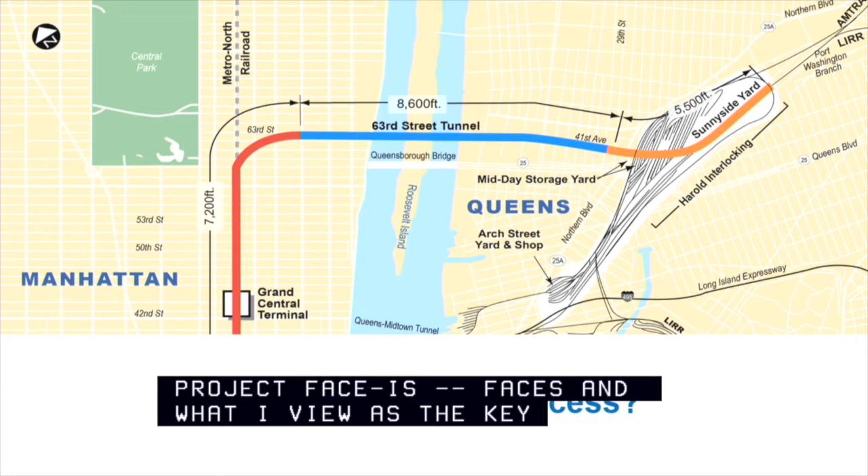East Side Access is MTA's largest capital project. In fact, it's the largest federally funded transportation infrastructure project in the United States. Together with Long Island Railroad's third track, East Side Access is the first significant expansion of the Long Island Railroad in over 100 years. We're finally making investments in a system that was built when Long Island had 37,000 people, when today it has almost 3 million.

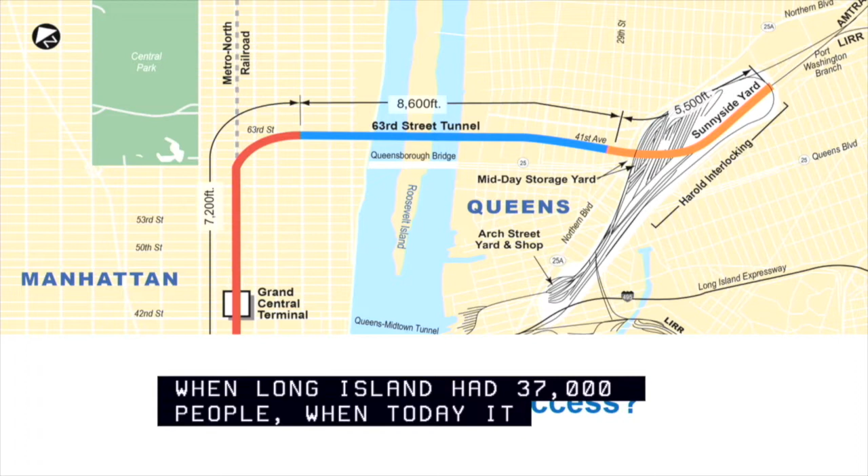Let me remind you what the project includes: 8 miles of tunneling, 25 miles of new tracks, a brand new 350,000 square foot concourse beneath Grand Central that is approximately 8 city blocks long, making it the greatest expansion in that great terminal in its 104-year history.

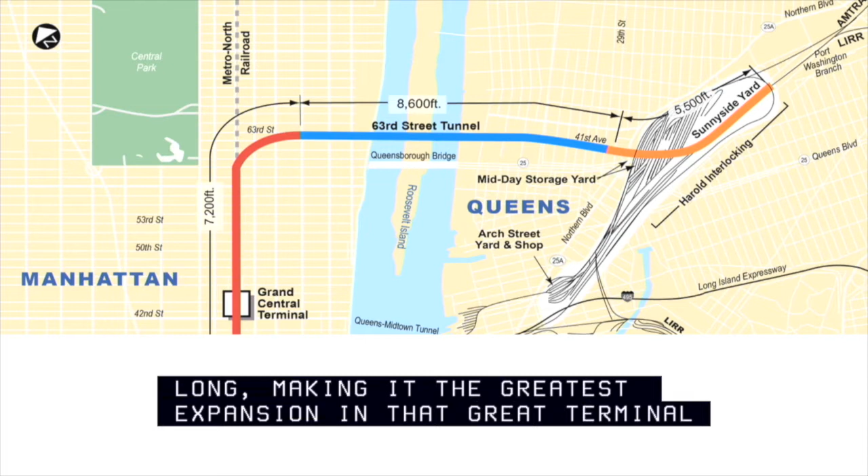And third, not to be forgotten, modernizing and fortifying the Harold Interlocking, the busiest railroad interlocking in North America, where there are almost 800 train movements a day, and which is utilized by 3 of the largest passenger rail carriers in the country. So what does the project mean for the city, Long Island, and the region?

It means faster commutes, direct access to Grand Central, fewer delays, and less crowding. Specifically, the project is going to provide Long Island Railroad customers on all 11 lines direct access to Grand Central, saving those commuters up to 40 minutes per day, which adds up to roughly 10 full days a year for family, work, and other activities. 50% of today's Penn Station-bound Long Island Railroad ridership is expected to use the new Grand Central facility, which is going to reduce overcrowding in Penn and on the surrounding subway lines.

The time savings I've just mentioned have real economic benefits. Government metrics peg the value of those time savings at roughly $300 million a year. And faster commutes mean real opportunities for working families on Long Island to access high-paying jobs in Manhattan. And last, not to be forgotten, East Side Access will create redundancy, which, as we've learned from natural and human events in the past decade, is something we desperately need.

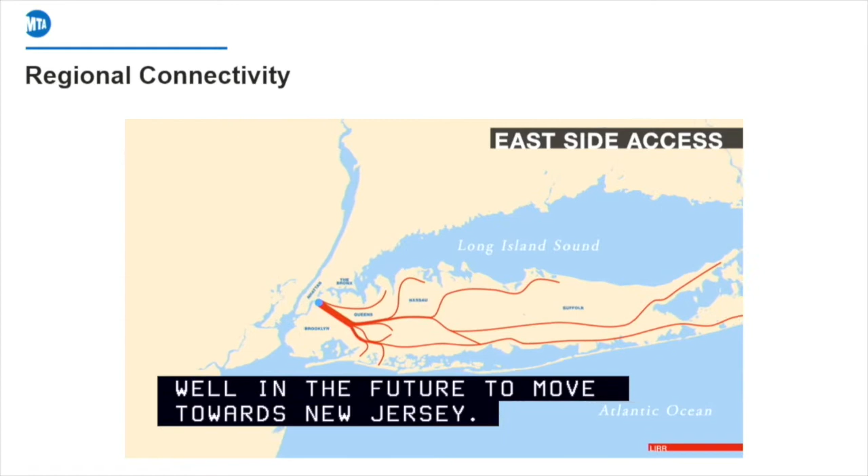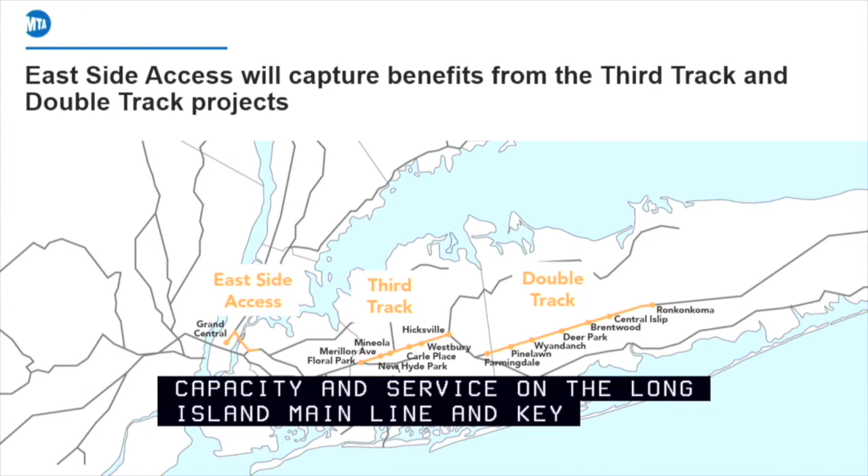It also allows us to capture the full benefits of the very significant third and double track projects in Long Island, significantly increasing capacity and service on the Long Island Main Line and key branches, and not to be overlooked, reverse commuting, which is extremely limited today, is made possible with the capacity and reliability focus that East Side Access will provide. As I mentioned at last month's Railroad Committee meeting, East Side Access is a massive investment in the state of good repair.

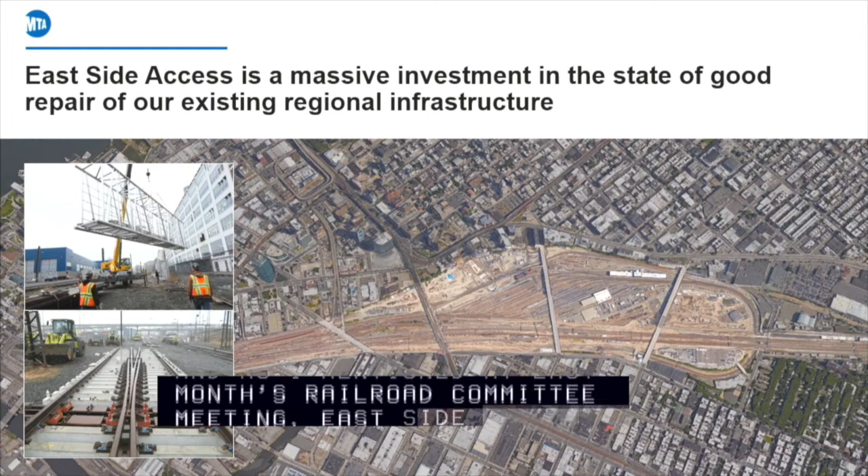We've seen again and again, most recently with Amtrak last summer, that state of good repair matters, and we have to get ahead of these infrastructure crises. East Side Access really is allowing us to invest very significantly in the long-term viability of our entire regional railroad infrastructure, and I'll talk about some of that in a moment.

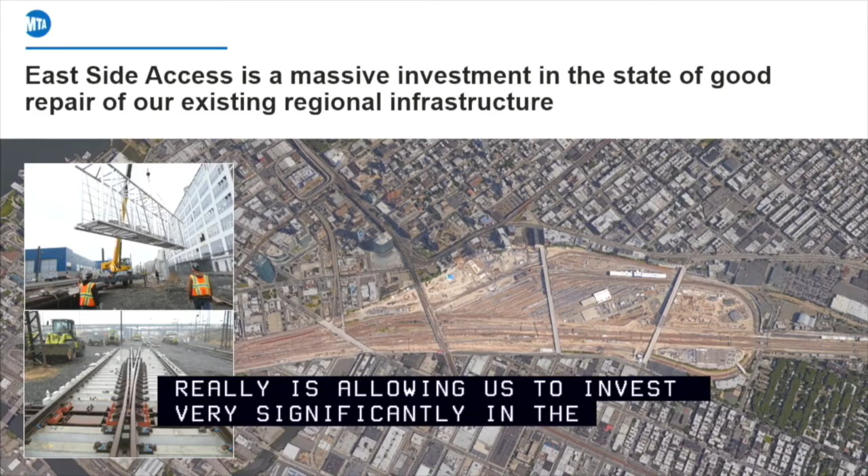The project status: it is 73% complete. I'm going to talk first about the progress in the Harold Interlocking, which is a key element, as I said, for the whole regional railroad system.

I'm going to show you an animation. As I said, the 100-year-old Harold Interlocking is the busiest passenger rail interlocking in North America. I'm going to show you an animation of how Herald works now and how it's going to be improved by East Side Access.

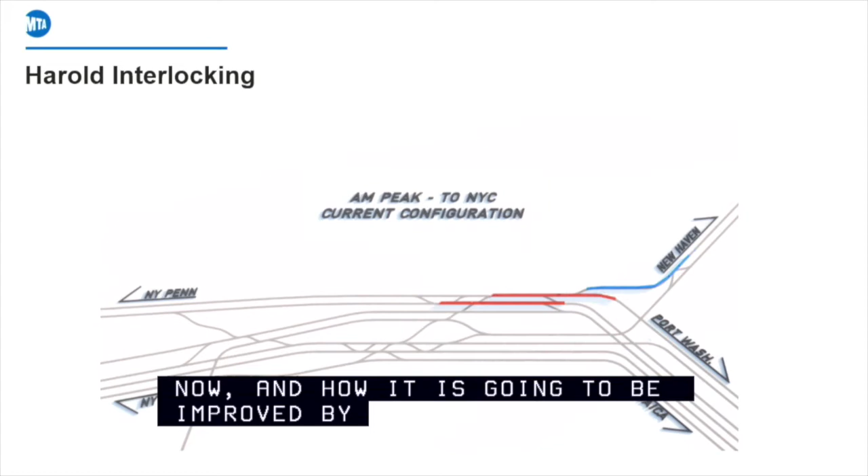Here's a representation of the train tracks to Harold today during the morning rush. The red is Long Island and blue is Amtrak. You can see how the trains occasionally interfere with themselves and are forced to stop to wait their turn. Similarly, there's outbound problems in the evening.

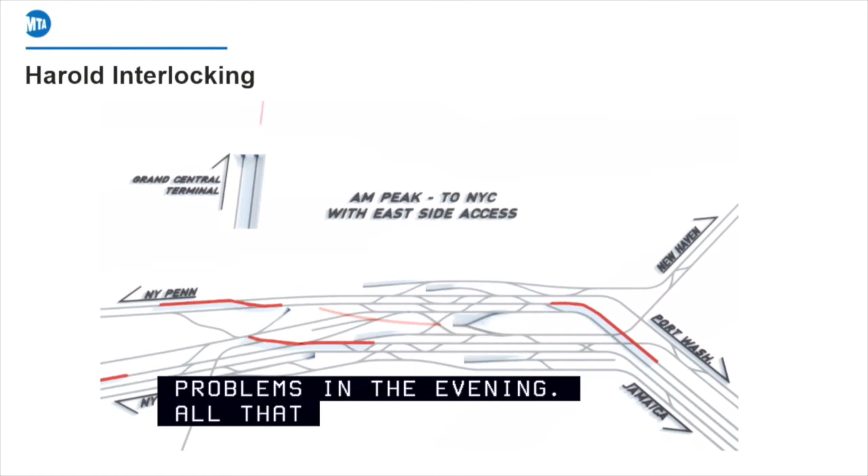All that stopping now, in the post-East Side Access configuration—note the increased number of track switches and overall routes, and as you can see, the trains are traversing without those types of delays. That was a little fast for me to get all my words out, but that's the truth.

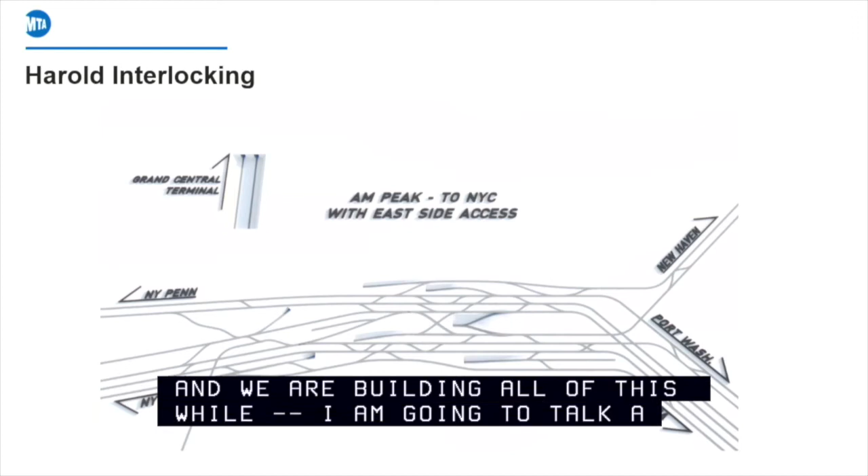We're building all of this while the existing train operations to Penn Station continue. So you're operating in the busiest passenger rail environment and trying to get work done in the middle of that.

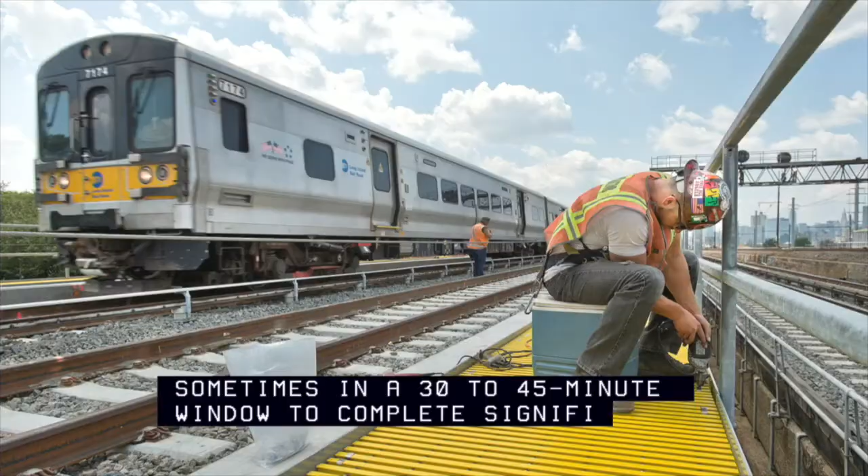With 780 train movements a day, we have to perform work around train schedules, sometimes in a 30 to 45-minute window, to complete significant and challenging activities. It's no secret to this board that some of that work has been challenged by the operational needs of Amtrak in particular, sometimes Long Island as well, and the constraints on outages.

We've made significant progress on the outage front, getting certainty about this project's ability to get outages, but we are proud that we've only delayed 7 trains during the entire duration of this project as a result of our East Side Access work.

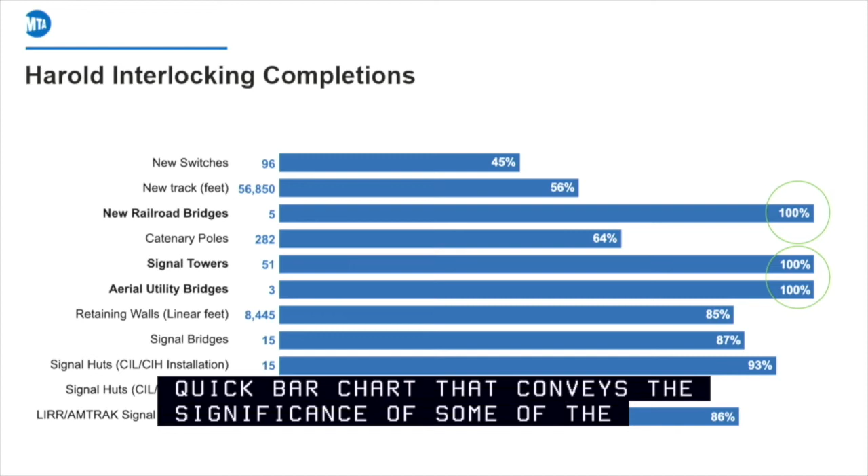Quick bar chart that conveys the significance of some of the components of the Harold work. I'm not going to go through all of it, but it includes, for example, 10 miles of new track, 5 railroad bridges, more than a mile of new retaining walls, and 15 signal huts, which are part of this incredibly new modernized signal system.

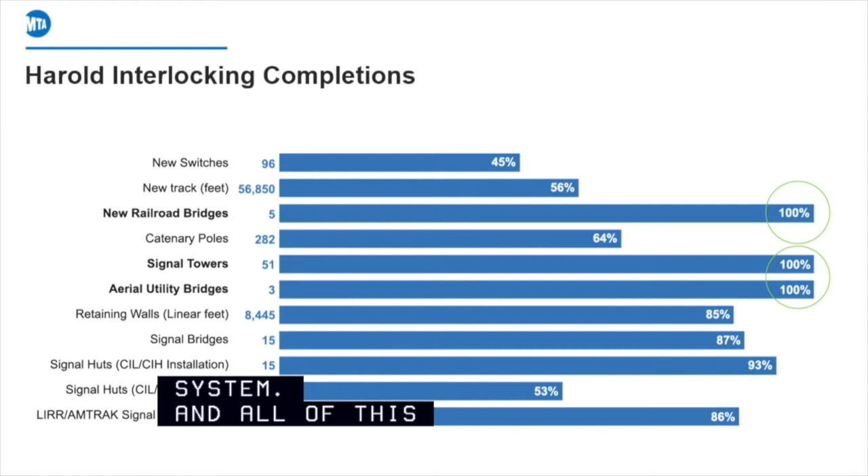And all of this is delivering benefits to riders already. This is an important point that I'm not sure is widely understood: as we get this work done in Harold, it is improving reliability and durability of our regional rail system today, and is not, in fact, waiting for the opening of the concourse, which is obviously what we are all shooting towards.

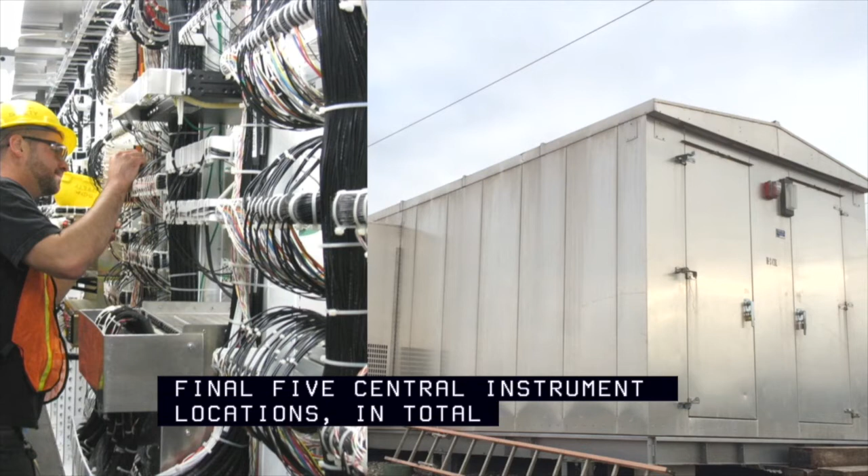Specifically, we've begun pre-cutover testing of the final 5 central instrument locations. In total, there are going to be 10, and the testing is going to continue through March 2018. In May of next year, the new CILs will be put into service. Once the cutover is complete, we can finish the relocation, removal, and replacement of tracks and switches in the eastern end of the interlocking over next summer.

This critical timeline will allow for the on-time start of work on the remaining tunnel approach, which is going to bring our final tunnel to the surface. All of this is pretty technical sounding, but it's hugely important to deliver that capacity.

The concourse itself on the Manhattan side is 350,000 square feet, about 8 city blocks long, a contemporary version of what we know as Grand Central with modern amenities. Over the length of that concourse you can enter at different points, which is going to allow people to get to and from work more quickly, and on their return, to locate the right spot on the train for the most efficiency, benefiting from time savings as they navigate to and from the train.

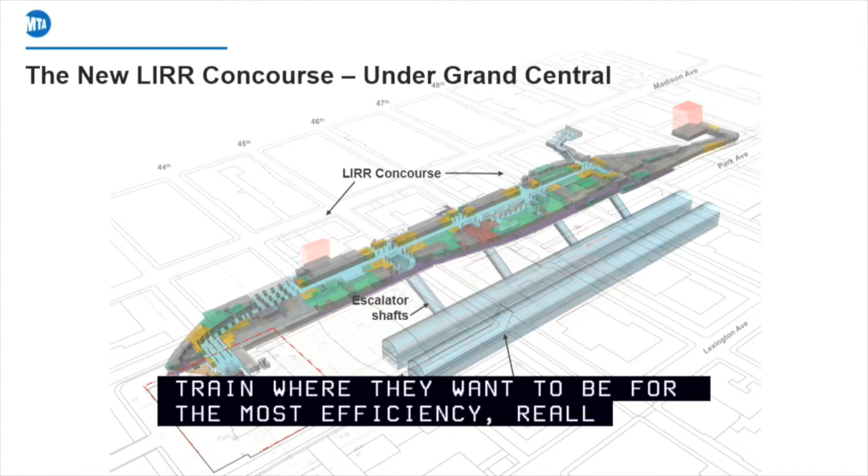Public areas are going to have cellular and Wi-Fi fully. The finishes are reminiscent of the rest of Grand Central, and the retail plan includes 25 separate stores plus opportunities for what folks call pop-up — we used to call them kiosks, but now more elegantly it's called pop-up locations — as retail demands evolve. The concourse, looking north-south, is 41% complete.

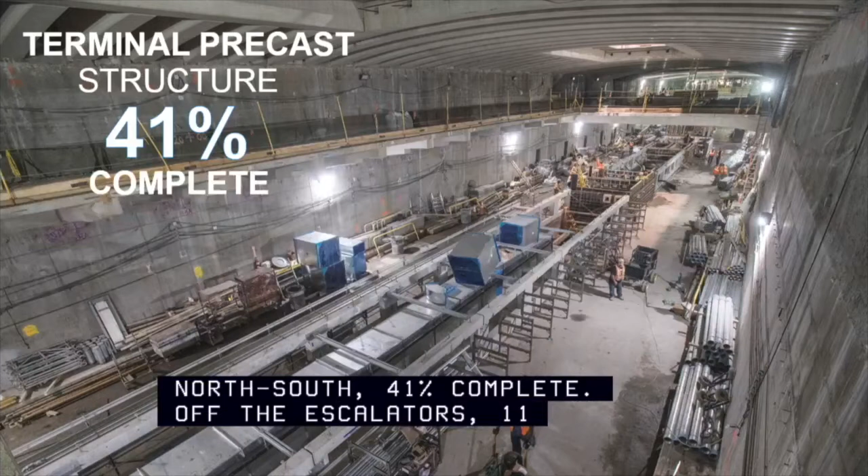Half of the escalators, 11 out of 22, have been done. In the caverns, we excavated 6 miles of tunnels, in effect like laying something 1,200 feet long — it's like laying the Chrysler Building on its side underground. And it was all done without any visible impact to commuters upstairs on the street. That's a huge benefit of this project, that we have not damaged the activities of our central business district.

In Queens, we have 4 tunnels that amounted to 2 miles of excavation, and in those same recently bored and lined tunnels, we have begun installing track in recent weeks.

What's left to do? It's a huge project. It's 75% done, but the last 25% is really the most challenging.

We've got to fit out the concourse in the terminal in Manhattan. We've got to install all the tracks, the traction power, and the signals in Queens and Manhattan. We have to do the Long Island Railroad's midday storage yard in Queens and a section adjacent to Harold Interlocking. And we have to finish connecting and bringing to the surface those 2 remaining tunnels from Manhattan. Most important, we have to undertake and successfully complete all of the systems installation and testing.

Challenges — the most important part of this presentation. I have undertaken an independent review of the project, and I'm here to tell you that since there was a rebaselining of the project and a reorganization in 2014, there has been significant progress made. That said, the project has not been fully successful in resolving all the challenges that this project, and any project of this scale, may face.

Specifically, we have it across the agency that there is a certain silo quality of organization that exists. This is partly a vestige of the way this project was originally conceived, when we broke it up into many different contracts for all kinds of reasons many years ago. The result is that those different contracts and programs run into each other, and we need to reorganize and redirect this project so that they are truly working in a dovetail way, in a streamlined way, and in tandem with each other, so there's much more coordination.

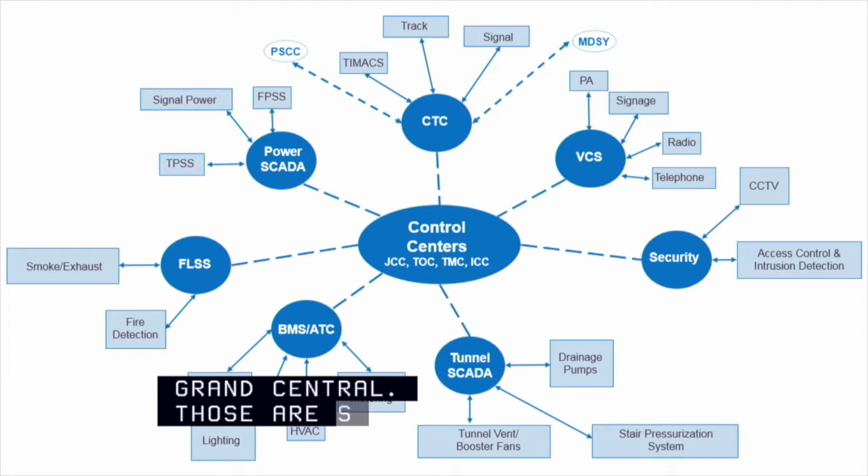Systems testing—well, I botched that, that was the last one. But here's systems testing: there are 29 separate systems that need to be integrated before we can launch service into and out of Grand Central. Those are systems that affect safety through 7 interlockings in and out of Grand Central. They support a safe and comfortable station environment, control and monitoring of access and security, radio, telephone, public address, tunnel ventilation, system-wide electrical power—and you see how interconnected they all are.

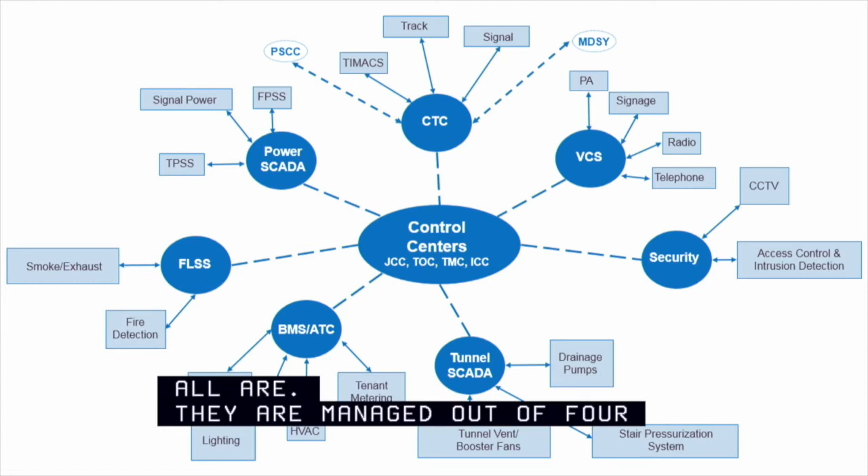They're managed out of 4 separate control centers connected by a complex network communication system. So we've got to really get in control of this, and part of that is we're recommending that we start systems testing now rather than waiting for all these different contracts to finish, complete their systems, and then see how it all works together. Our approach is we've got to start testing systems now, even if it's on an incremental and partial basis.

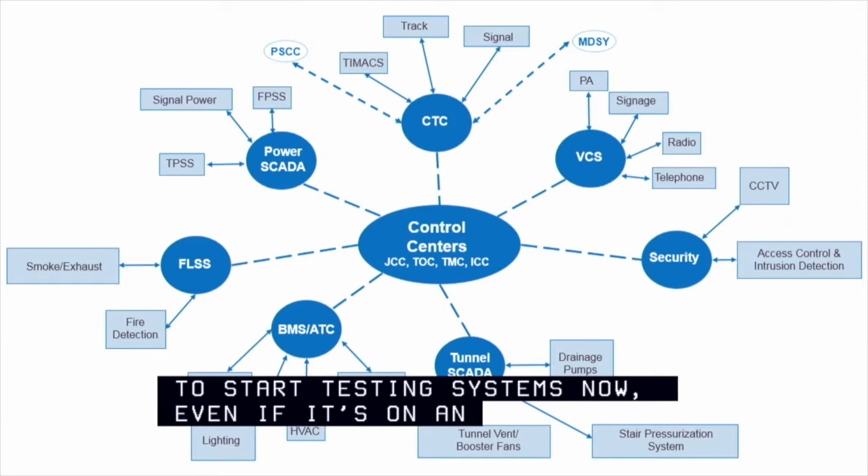To that end, I have 6 significant changes I want to make right away, with the leadership's blessing, hopefully. One, we're going to move from bulk construction to finishes and systems. Two, we need a different approach to schedule. Right now our schedules tend to be retrospective—all the different contracts report on what they got done, and then we roll it all up. What we really need is a schedule we can use to drive prioritization of work, and that's a different kind of schedule we need to move toward.

Third, I'm going to create what I'd call a project management organization team—a centralized SWAT team that has the power to prioritize work and remove roadblocks. That's the only way to get all these different contracts aligned and prioritized properly. Fourth, as I said, we're underutilizing our CMs, our construction management consultants, and they need to be empowered and held accountable, including for change orders, given the opportunity to justify them or get shot down if they can't.

Timely. Fifth, we need to reform the change order process. I think I've talked enough about this—we need to alter how we get them done, eliminate the bureaucracy, eliminate the layering, and have a committee that actually faces the change orders in a timely way. Part of the duration issue is that we don't prioritize all these change orders. Some require redesign, so we've got to decide which ones are important, which are justified, and then push them through the redesign process so they don't end up holding things up.

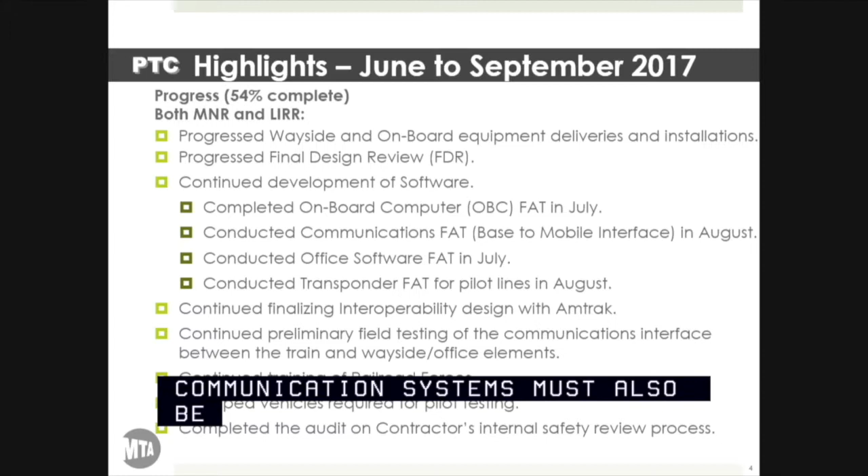Both railroads expect to have all of their installations complete by the end of 2018. The railroads also must have acquired all of their spectrum, which both railroads have right now. The railroads must also have their training programs complete and have trained enough of their staff to support revenue service demonstration on the pilot lines, and we expect to have that done by the end of 2018 as well.

Finally, the railroads must have their pilot lines in revenue service demonstration. This is going to be the most challenging criteria to meet, but we're still confident that we'll have the software ready to actually demonstrate the full PTC functionality on our pilot lines by the end of 2018. As part of the new law, if all of these criteria are met and the railroads are in compliance, the railroads have the opportunity to request an alternate schedule in order to test and fully commission their entire network with PTC operations.

So at this point in time, the railroads are about 54% complete.

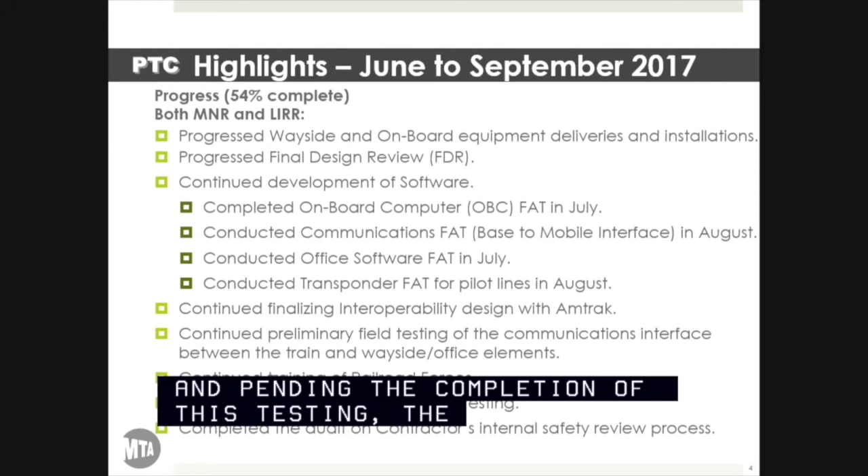The railroads continued the development of software for various elements of the system, and pending the completion of this testing, the subsystem FATs, which were originally planned also to be complete in the last reporting period, those activities are still in progress. The test team has been pretty busy over the last few months.

July and August has been pretty busy for us. We actually conducted the onboard factory acceptance testing for our onboard computer, with the exception of remote diagnostics. But what this software does is allow us to start preliminary field testing with interfaces between the train and the wayside.

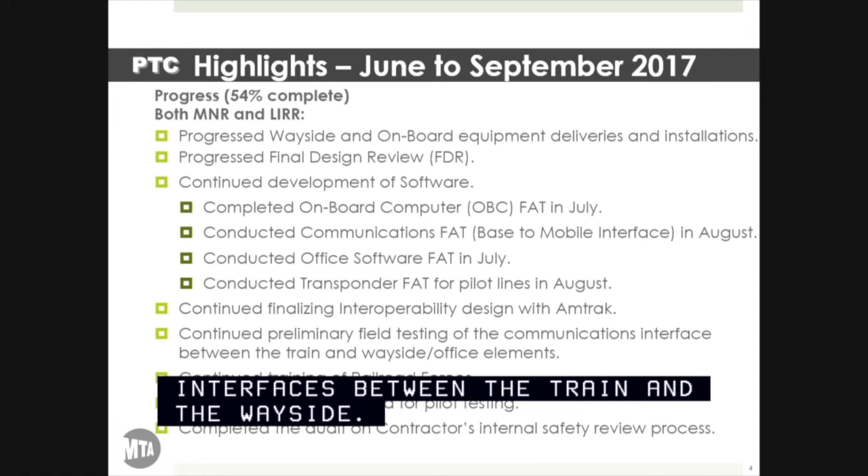We conducted a factory acceptance test for the communication manager, a key element of the system, which basically provides the communication between the base and the mobile package that's on the train. We conducted the software FAT for the office, and we also conducted a transponder FAT for the pilot lines. Although we conducted these factory acceptance tests, we still need to do a little bit more work to make sure it's working as designed, and the test teams will still be working hard to get that work done.

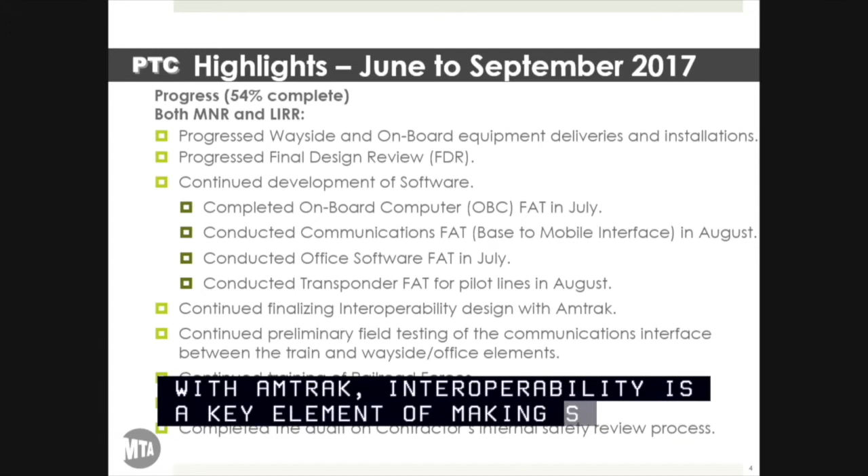The railroads continue to finalize interoperability design with Amtrak. Interoperability is a key element of making sure that the system fully functions. We've been meeting with Amtrak weekly to finalize the physical interfaces for our communication networks and our safety servers. We continued preliminary field testing of the communications interface between the train and the wayside and office elements.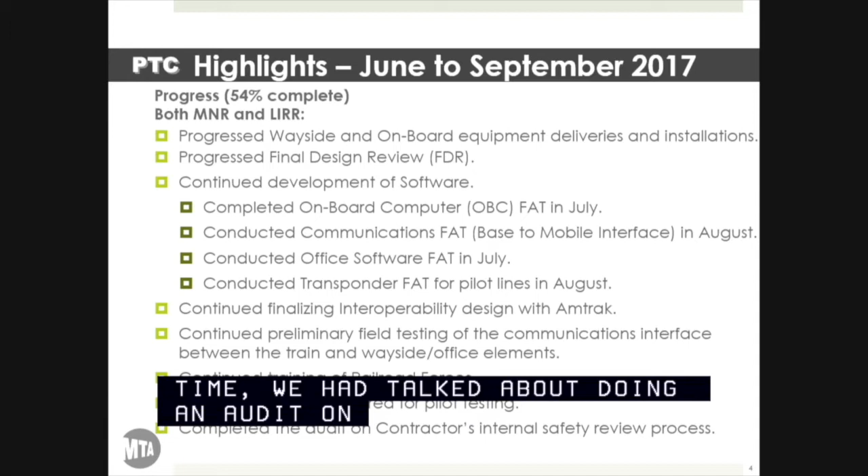We are still developing our training program, continuing to train people as we develop those programs. We equipped enough vehicles on our system to support pilot testing. Lastly, when we met last time, we had talked about doing an audit on the contractor's internal safety review process. No significant findings were made, but we're still looking at the artifacts provided by the contractor, and we'll schedule follow-up sessions to ensure those documents support the submission of our systems and safety plans.

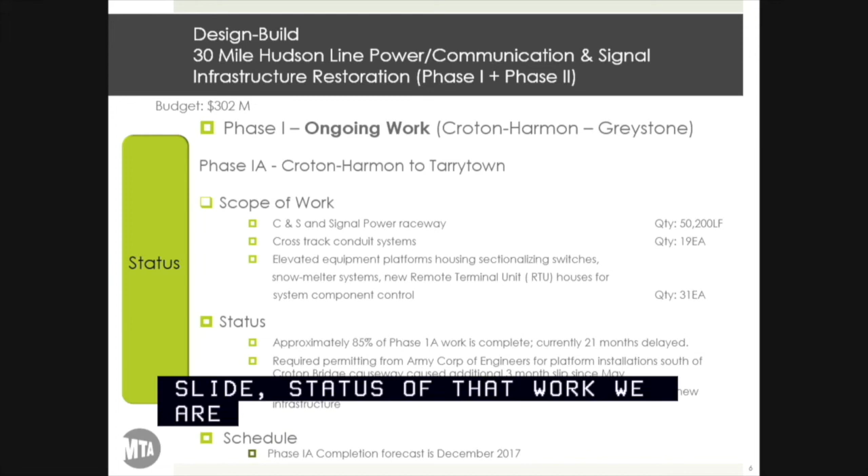We're in Phase 1A right now, which is from Croton Harmon to Tarrytown. Significant work is planned and underway, as you can see from the slide. We are now 85% complete with Phase 1A. The work is currently 21 months delayed, a 3-month slip from last time we reported to you earlier this year. The cause of the 3-month delay was a delay in getting approval from the Army Corps for permitting required to do work on a causeway south of Croton Harmon, where we had to install both infrastructure as well as platforms to remove some of the equipment out of potential flood area. Phase 1A is scheduled for completion this December.

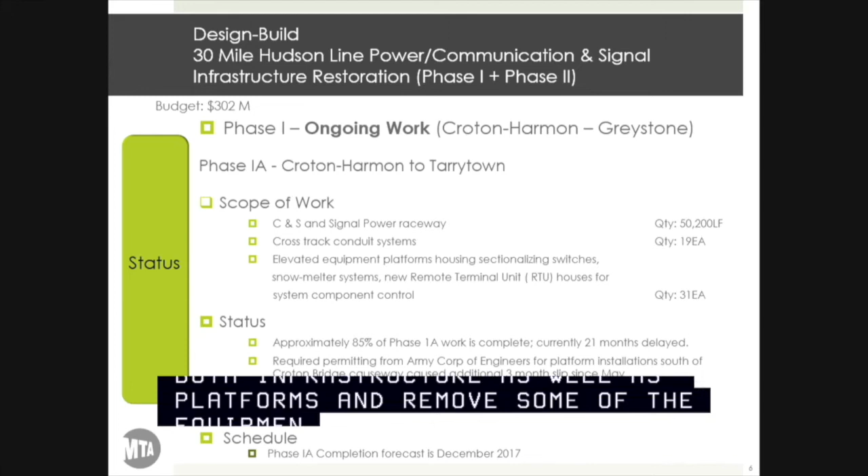Phase 1B, which is a 6-mile section from Tarrytown to Greystone, is similar work. We expect to start that in January of 2018 with a March 2019 completion.

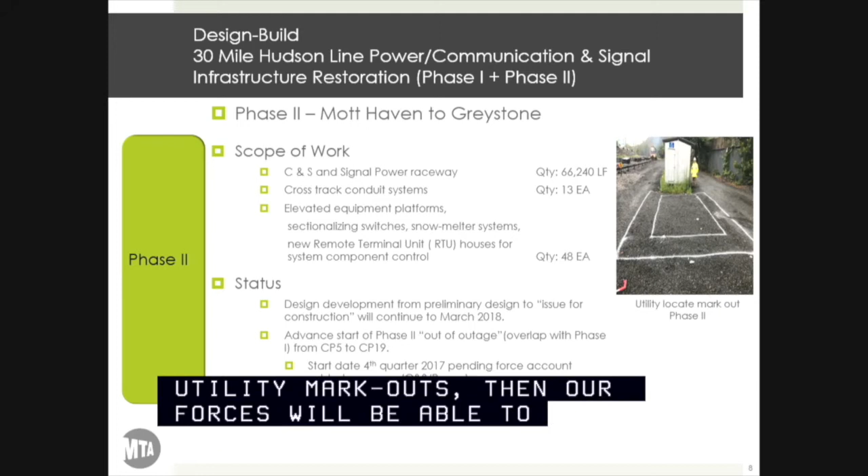Phase 2, Mott Haven to Greystone, is a 14-mile segment with larger quantities of raceways, conduit systems, et cetera. What we're doing right now is working with the joint venture, completing the design, getting design development done by March, and beginning to look at overlapping Phase 2 work with Phase 1B work. You can see some of the markouts in the photo on the right, where we're doing utility markouts. Then our forces will get in there and start doing work, and the joint venture will begin their work as well. Phase 2 completion is forecast for March of 2021.

The next slide shows pictures of the installation. The one on the left is interesting because that's the causeway — essentially Hudson River riprap, with space to put in these double troughs, and then the right-of-way. The Army Corps permit was required because we're putting in platforms as well to hold some of our central instrument locations and other types of equipment to get them out of potential storm surge.

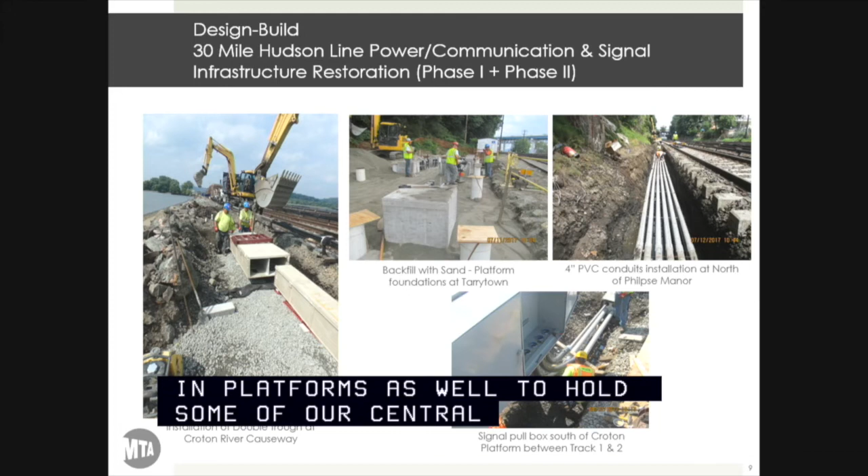The next part of this is the mitigation strategies. We identified some of these early on in the project and we'll continue them. We provide the joint venture with long-term outages, sometimes extending past scheduled dates. We've done this over the last months and will continue. We increased flaggers from 12 to 16 to increase production rates, which, frankly, has been more successful lately, and we're hoping that continues.

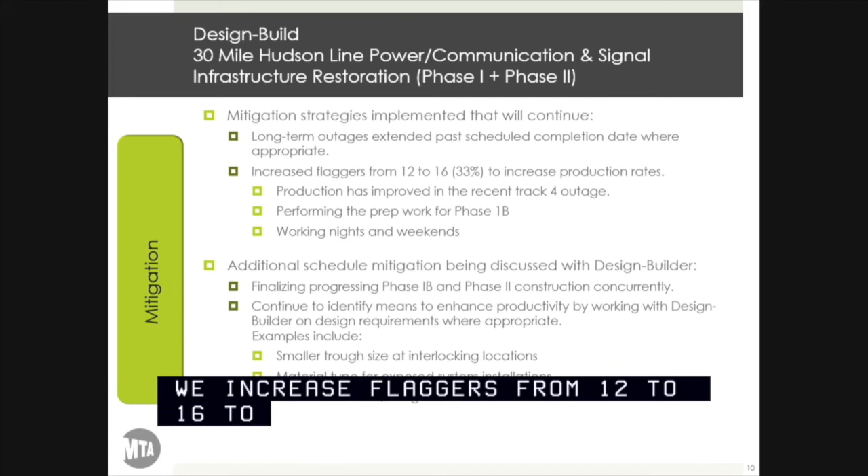We're working with the design builder to try to overlap Phase 1B and Phase 2 work, looking at smaller trough sizes at interlocking locations — smaller trough takes less real estate. We're also looking at areas where we could continue to use additional existing conduit and trough at discrete locations.

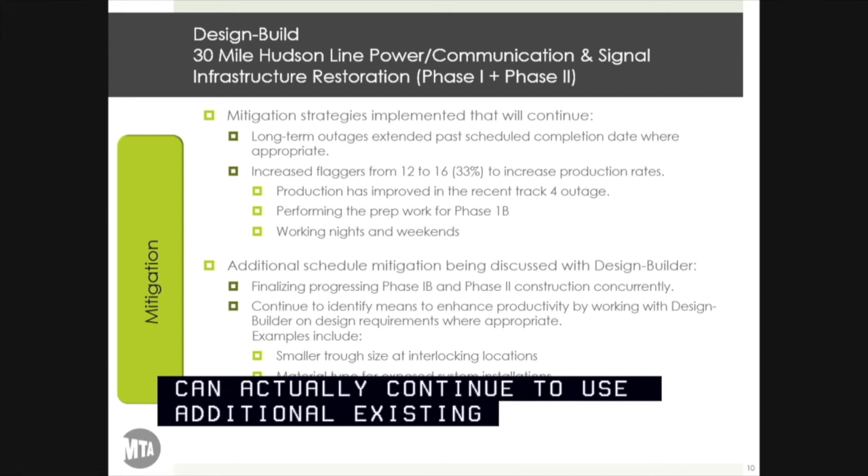The budget is $302 million. We're assessing the budget impacts resulting from the delay. We expect some cost increases to occur. The responsibility for those cost increases between the railroad and the joint venture needs to be finalized, and we are assessing liquidated damages, which could obviously impact any of those impacts.

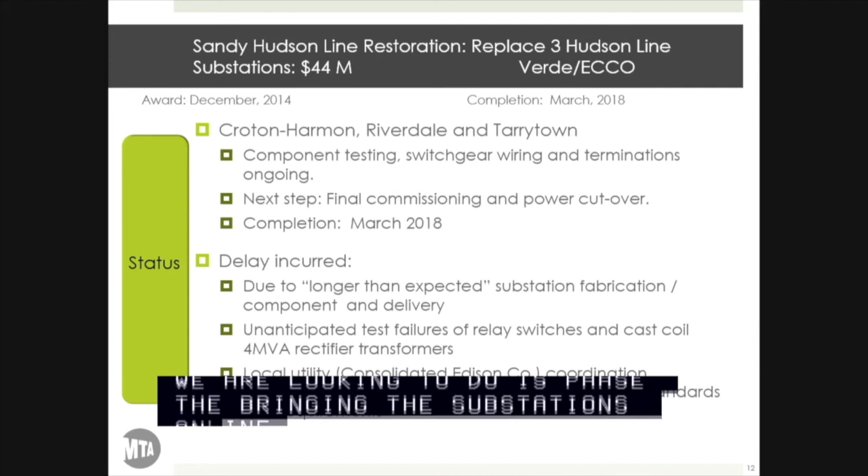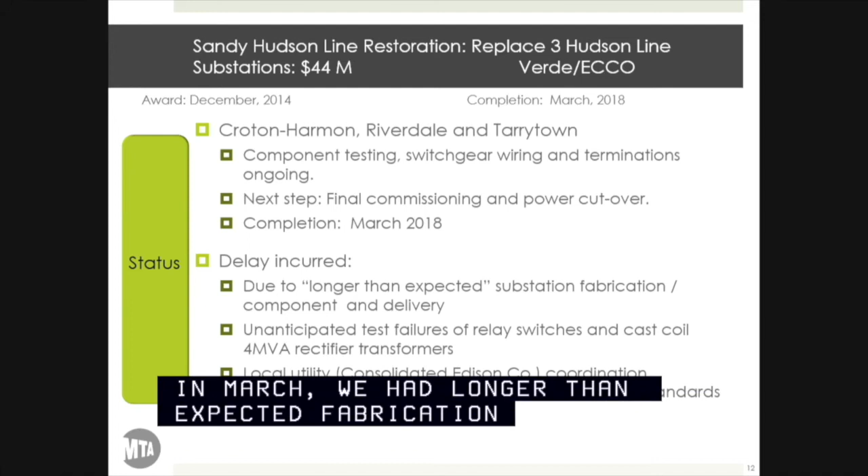Final commissioning is upcoming with power cutover, with completion in March of 2018. The project slipped from our last report 6 months ago, and is now in March. We had longer than expected fabrication and component delivery for some of the components for these substations. There were some test failures in some of the relay switches and transformers, and also delays in getting Con Edison to do some inspection and coordination of these substations.

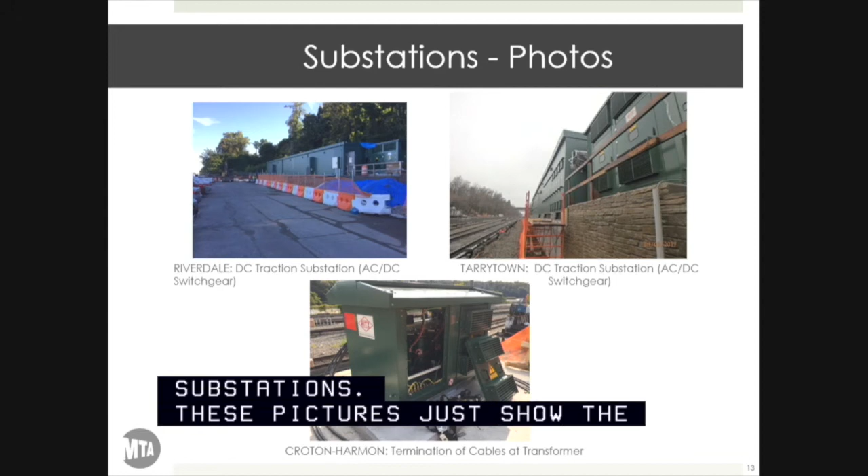These pictures show the almost completed substations at Riverdale and Tarrytown, and a small transformer termination at Croton Harmon.

The next project is Customer Service Initiatives, a multi-phase program of work that includes upgrades to service information systems at Grand Central, at outlying stations, and at certain Metro North facilities. The program complements, and is complemented by, the MTA-wide advertising concessionaire that was approved last month.

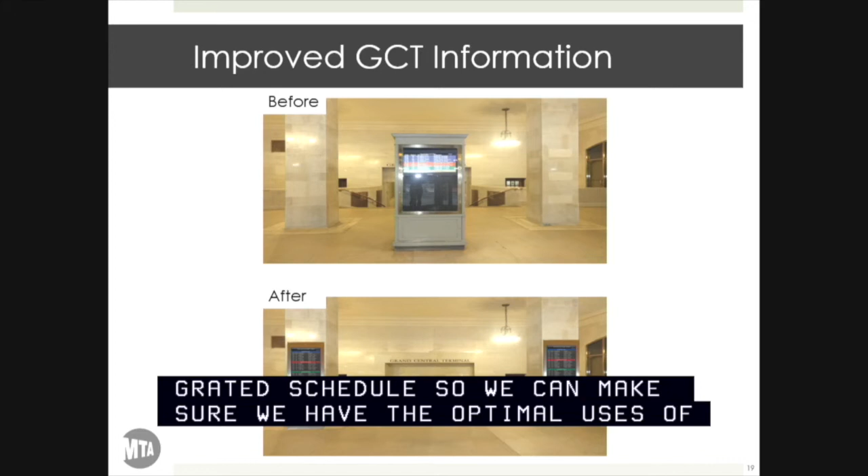The next couple slides I'll go through quickly. In GCT you can see old technology, pretty big infrastructure - it's like our old TVs. Now we're moving to flat screen technology, which we can put up against columns. In the bottom slide you can see the route you're trying to take to get into Grand Central and still get the customer information you're looking for.

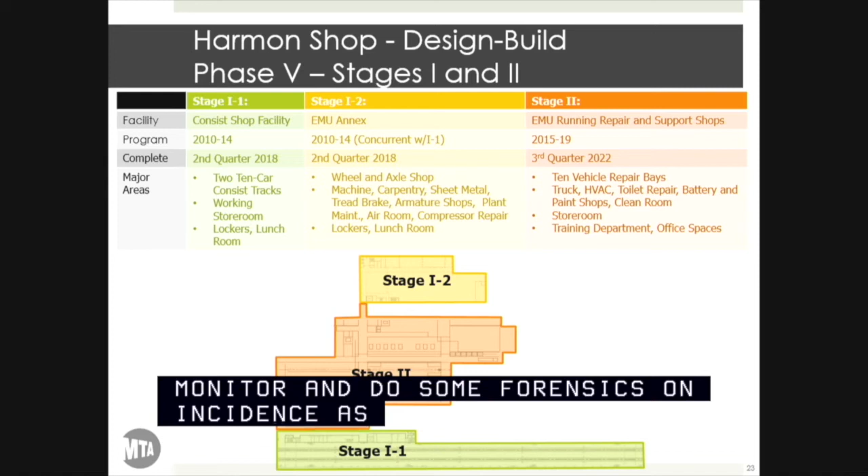The final project is phase 5 of the Harmon shop. We're actively doing work in stage 1, shown in this slide as stage 1-1 and 1-2. Stage 1-1 is at the bottom - it's a 119,000 square foot, 2-track, 10-car consist shop. Stage 1-2 is a 74,000 square foot, 2-story support shop that provides a lot of the back shop support for our shops.

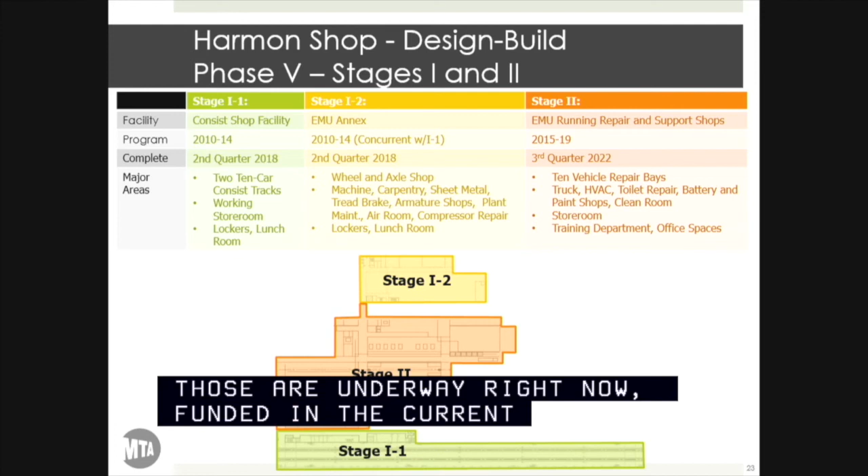Those are underway right now, funded in the current program. Stage 2, which is in design, will be funded in the 2015-19 program. The Stage 1 work is a $316 million budgeted project, with completion in April 2018.

Work is ongoing, moving towards completion. The project is within budget. The schedule for completion is now projected to be April 2018 - that's a 3-month delay due to some delays in getting industrial equipment that has to go into the support shop.

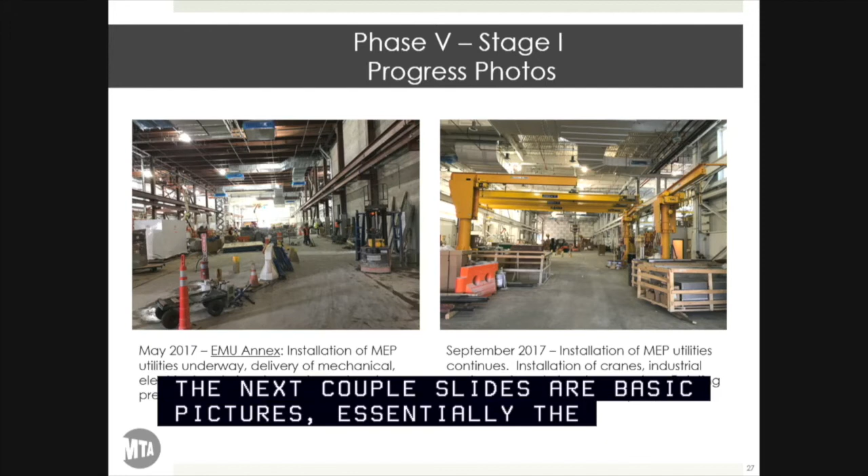The next couple of slides are basically pictures. The message here is that early on, last May, we were doing initial work. As we get to September, we're really doing a lot more wrap-up - we're getting close, we've sealed buildings, we're putting in equipment, we're putting in lifts, and we're moving in towards completion next spring.

Finally, Stage 2 of this project, Phase 5, is a $442 million budgeted project to do running repair and support shops for our electric multiple unit equipment. This will be the last phase of the MOV work at Harmon. We expect to award it in July 2018 with a 4-year project completion.

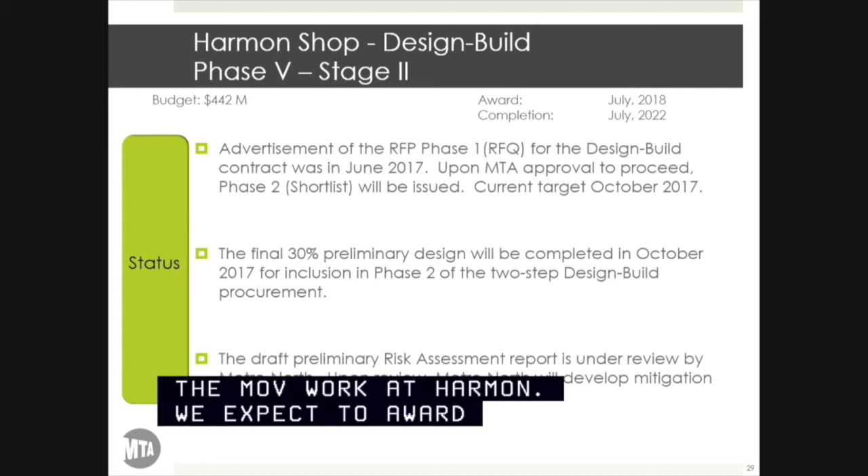We have shortlisted the projects, the two firms who responded to an RFP in June 2017, and we're looking to advertise for cost proposal and technical proposals. A draft preliminary risk assessment report is under review by the railroad, and upon review, Metro-North will be developing mitigation strategies to limit our risks. That concludes my comments, and I guess IEC's next.

Sorry, if I can ask the commissioners for permission, if anyone disagrees with me, I'd like everybody to summarize. We no longer have to read these, books have been out for quite some period of time, so we'll go to a quasi-consent where the focus should be how much time is left on the project, and are we going to be on schedule, and where do we stand vis-a-vis cost? Are we on budget, under budget, or over budget? The most important things from this point going forward for the rest of the day, given the time. Any issues? There being none, Mohammed, it's all yours. Actually, it's me, Mark Cosmetti, and it's okay.

I'll start off with the Hudson Line Sandy project. The IEC agrees with the agency's assessment of the delay and the future scheduling of stages. As you heard, the additional 3-month delay since last CPOC was due to a delay in the Army Corps of Engineers permit. On the budget, the IEC agrees with the agency that the budget will need to be increased. The reasons include the schedule delay results in additional monthly soft costs, and the executed and projected change orders to date will likely exceed the current project contingency.

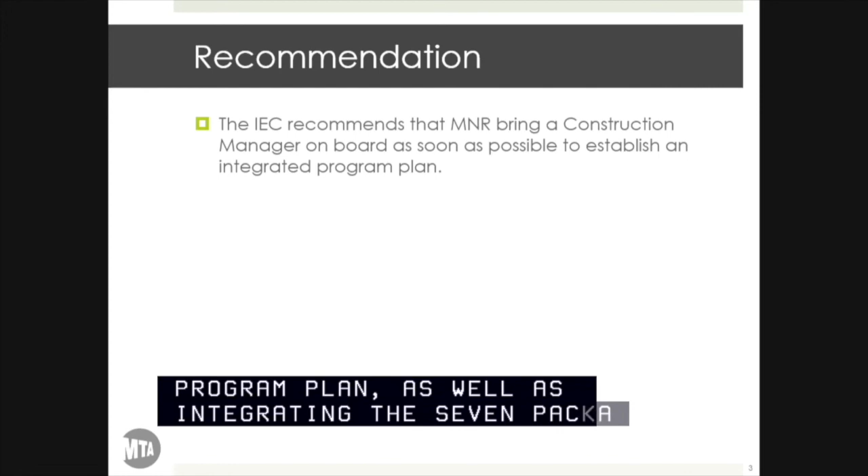Thank you. Up next is the Long Island Railroad Capital Program update. Good afternoon. I'll be presenting an update on the capital program along with the status of the Morris Park locomotive shop, Jamaica capacity improvements, and the mainline double track.

So as you can see here, this chart represents the status of the Long Island Railroad's 2017 capital program goals and our progress through September. We've achieved $423 million in commitments and are working towards the achievement of the remainder of our goals. Our starts, completions, and closeouts are also shown on the chart.

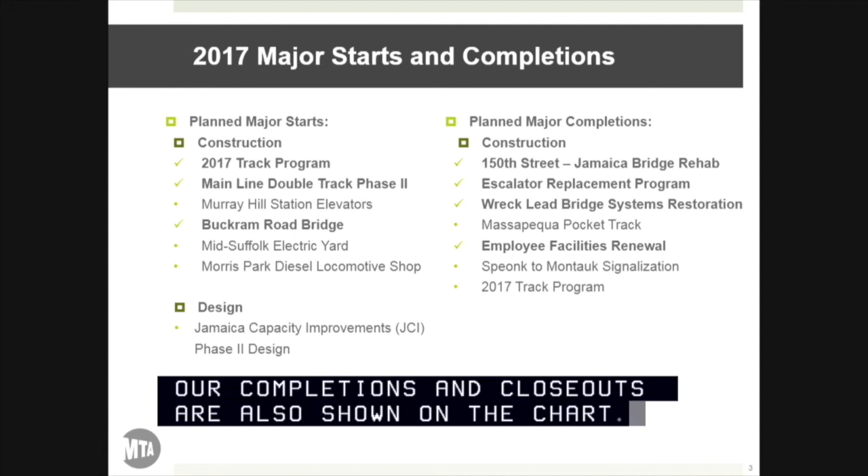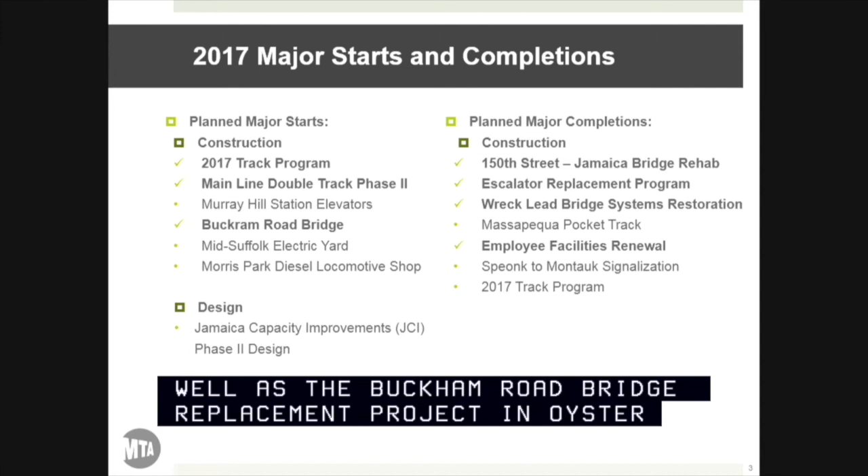This slide shows our major starts and major completions, which include project tasks over $10 million. Since our last update to the committee, we achieved additional starts on the mainline double track, the track systems and station contract, as well as the Buckram Road bridge replacement project in Oyster Bay. An additional project completion was achieved for the Wreck Lead Bridge Systems Restoration Project, which was a Sandy project.

Morris Park: as you all know, the existing Morris Park shop was built in 1889, well beyond its useful life. This design-build project includes construction of a new shop, employee, and material storage facility. In an effort to advance the shop construction, the Long Island Railroad hired a small business mentor program contractor to perform pre-construction work and site preparation, and that contractor is expected to finish in December and has progressed well.

As far as the design-build contract, we're nearly completing the procurement phase. The award has been adjusted one month since our last meeting. The procurement cycle has taken slightly longer than we anticipated. Our beneficial use is still maintained in the first quarter of 2020, and the project remains within budget.

As far as risks, the Long Island Railroad, in conjunction with the Office of Construction Oversight and the independent engineer, conducted a risk assessment prior to issuing the RFP. The assessment identified project risks and informed development of a comprehensive design-build contract. In summary, the June assessment identified an unmitigated, or 80% confidence, project cost of $100 million compared to the project budget of $108 million, and a potential 14-week delay in completion.

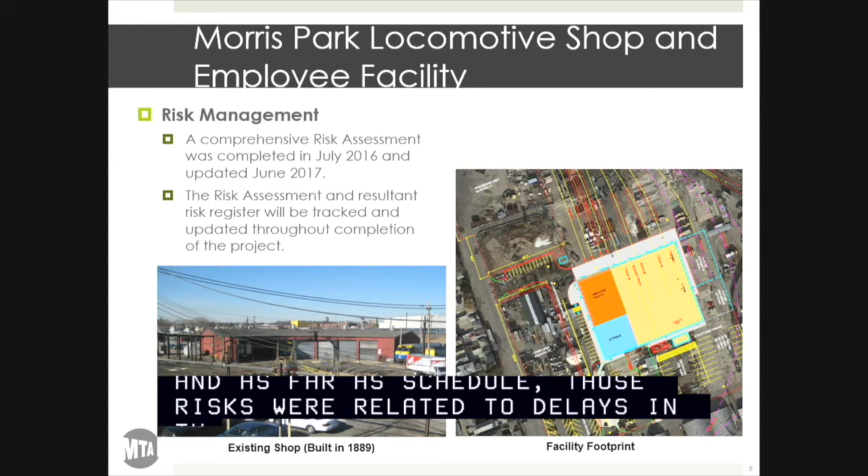The most significant risks identified in terms of cost were additional force account support necessary for final utility connections once we finalize the design, and risks of subsurface obstructions due to the historic use of that site. As far as schedule, those risks were related to delays in long lead equipment fabrication, as well as the design review and approval process. Of course, we will continue to monitor and update the project risks throughout the life of the project.

As part of the Jamaica Capacity Improvements Phase 1 project, we're in the process of building the 6th platform at Jamaica, required to support future service to our western terminals. This is one of our East Side Access Readiness projects, and the project is progressing on schedule and within budget. This aerial photograph shows the location of the new platform south of the existing platforms at Jamaica.

We're also installing some high-speed universal crossovers outside of the Jamaica station area to provide greater access to the station during the full reconfiguration of Phase 2.

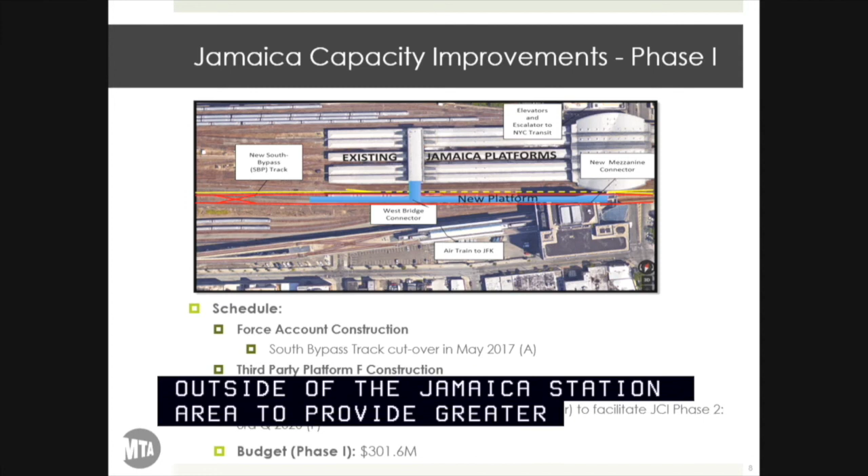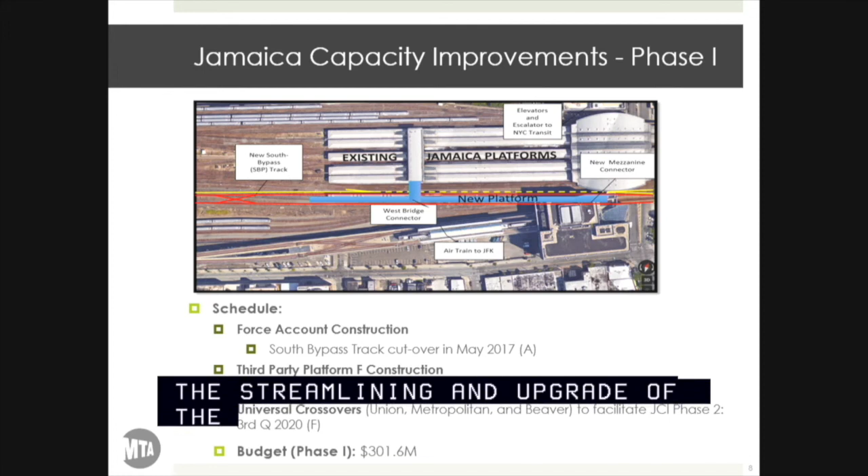As far as Phase 2 goes, we are in the process of procuring a design consultant for the Phase 2 reconfiguration, and we plan to complete that procurement in the next month. Phase 2 will entail streamlining and upgrading the Jamaica interlockings for increased throughput and express routes, and bring our Jamaica infrastructure to a state of good repair. That work will be performed under multiple future capital programs.

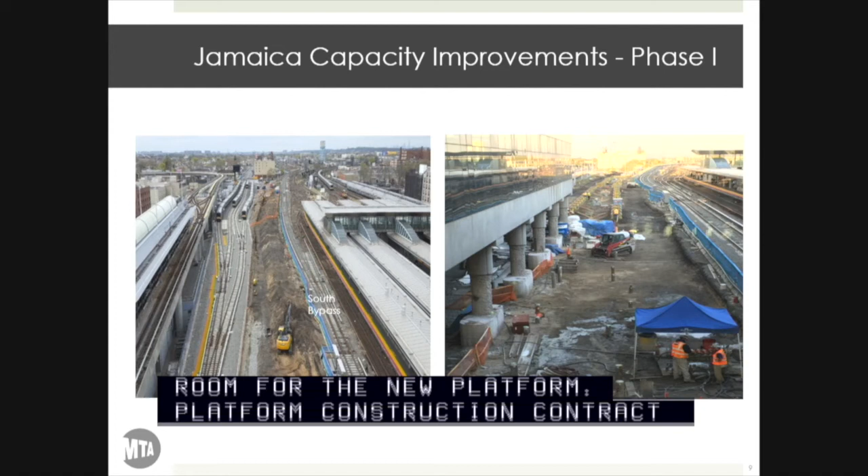Shown on the left here are the Johnson Avenue Yard tracks, which were shifted south by a prior contract, and the Jamaica Station southernmost tracks, which we call the South Bypass tracks, were shifted slightly north to make room for the new platform. The Platform F construction contract was awarded in September 2016, and progress to date is shown on the right. The contractor has been performing a tremendous amount of pile foundation and support of excavation work in preparation for the platform structure itself.

This is a bit more detail, showing some of the support of excavation systems required for our new stairway from the platform level down to Sutphin Boulevard, as well as some of the platform supports.

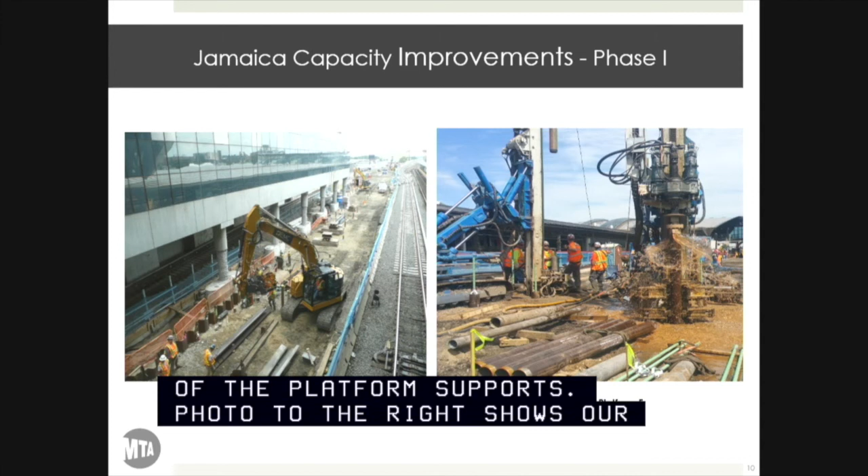The photo to the right shows our micro piles being drilled for the platform. The new platform required over 180 micro piles. That operation started in the middle of summer and was complete by mid-September. Out of the 180 piles, only 4 remain, which will support our new westerly bridge connection to make our entire station connected.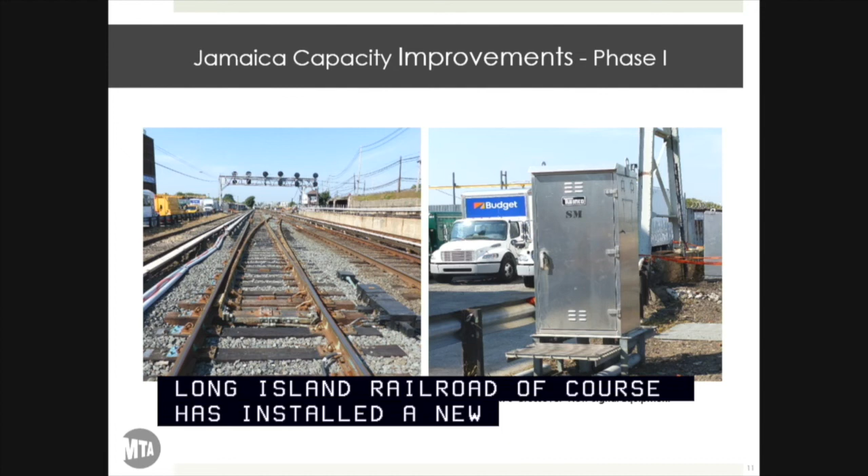Here's a photo of some of our other ongoing work. Long Island Railroad Forces installed a new crossover down in Dunton Interlocking on the Atlantic Branch, which will provide some additional operational flexibility for us. The photo on the right shows one of the new signal equipment pieces, a snow melting case for that interlocking. Work is progressing well, and we anticipate cutting over that crossover in the fourth quarter.

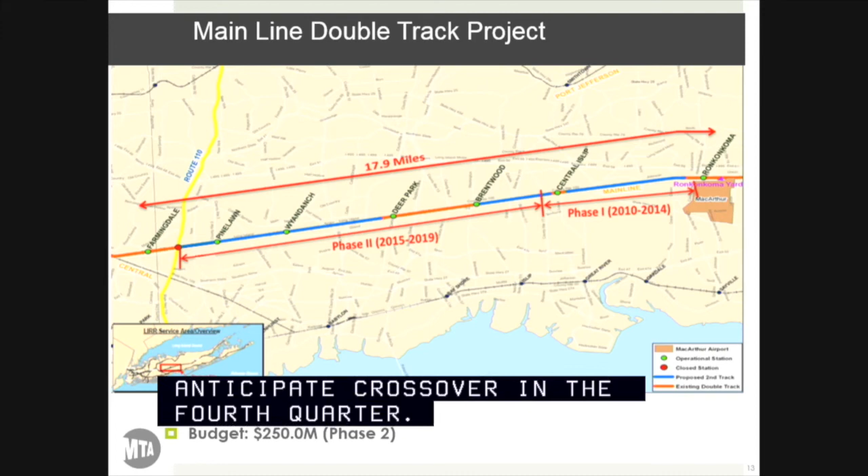And then finally, the mainline double track project. This $387 million project is well underway. As you may recall, the corridor is 17.9 miles long between Ronkonkoma and Farmingdale, and we currently have a single track with passing sidings. The project is split into 2 phases, and we're progressing on a fast-track schedule.

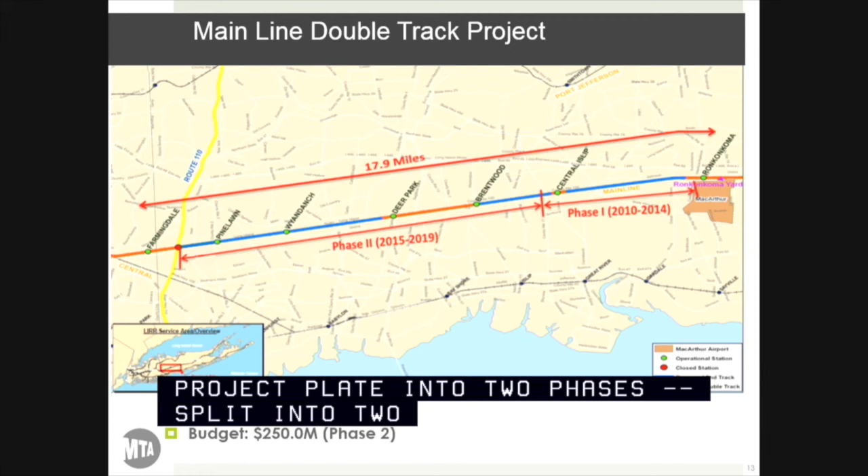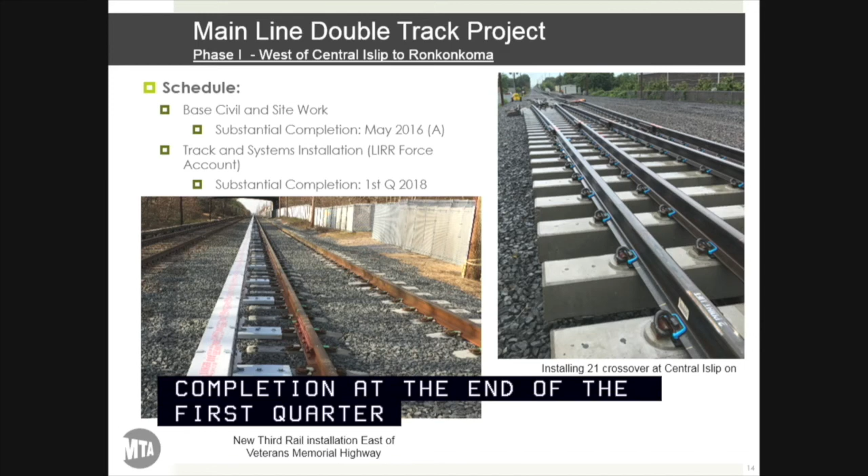The design-build construction for the Phase 1 civil and site work was completed back in May of 2016. That included all of our retaining walls and earthwork to allow us to build our track and install some of the systems. Long Island Railroad Forces have completed a majority of the track installation and surfacing. We're doing some third rail work and continue installing communication and signal wiring. The upper right photo shows one of the new turnouts installed in the Central Islip area. We're projecting Phase 1 completion at the end of the first quarter of 2018, and we'll cut over that segment following installation of all that equipment.

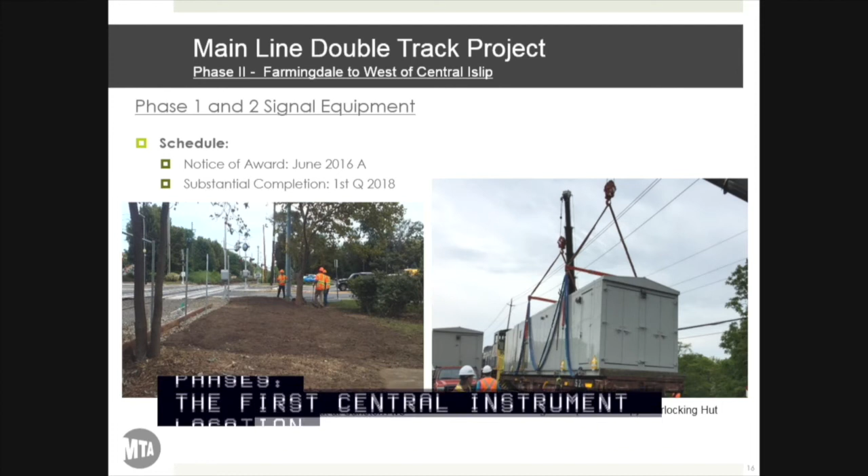The contractor for our new signal system continues fabricating equipment for both phases. The first central instrument location in Central Islip was received in June. The next 2 interlocking huts are due in October, at the end of this month, and at the very end of November, respectively. Long Island Railroad Signal Forces have completed installing a majority of the foundations and are installing equipment as it's received. Delivery of the Phase 2 equipment is expected to be complete by the end of the first quarter of 2018 as well. Some of these photos just show preparation work and the actual CIL being installed in Central Islip.

As far as the track systems and stations platform contract, that was awarded to LK Comstock. It was a $66.5 million contract, awarded in June. The contractor is installing the new track, the third rail, signal and communication systems for Phase 2, as well as the design and construction of the Wyandanch and Pine Lawn station platforms. Of course, the Long Island Railroad will be responsible for the overall system testing and commissioning.

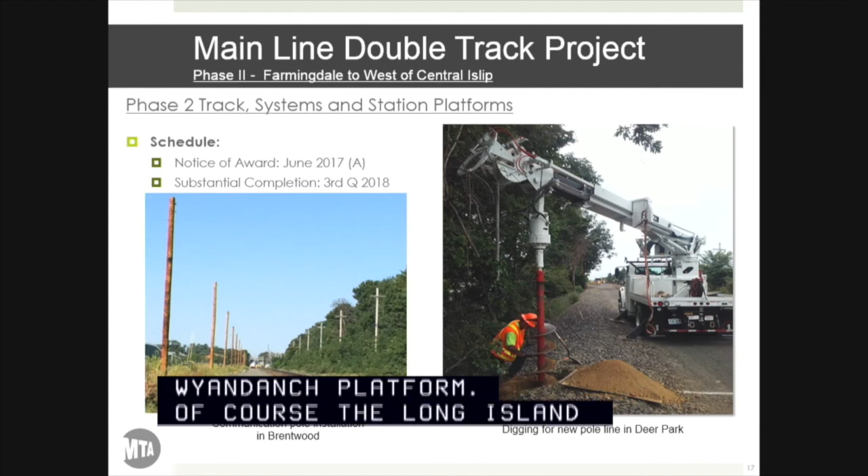As far as status goes, the station building design work is well underway. We've completed the foundation designs and the materials and fabrication. The contractor's been installing communications, signal poles, some cabling and hardware. Some grade crossing pads have been installed to support the track work, or track installation, which is anticipated to begin in December.

I think that's all I have. Any questions?

Just a brief comment about Jamaica capacity improvements, mentioned earlier by Commissioner Albert. PCAC and the Long Island Railroad Commuters Council continue to object to the way that project's being implemented. It's interesting how old East Side Access is, but there was a time when they thought everybody wants to go to Manhattan. Things have changed. Downtown Brooklyn is a destination for many people on Long Island, and I think this project with this platform presents a challenge for the Long Island Railroad going forward to provide Brooklyn service to Long Islanders. I think now things have changed back again, and Brooklyn is a place to go. I would hope that in Phase 2, the way the switches are reconfigured allows for an acceptable amount of service to Brooklyn, and that Phase 1 doesn't preclude any of that. And if there needs to be a change, I think we should look to do that. Thank you.

Anything further? Yeah, let me ask you something about Morris Park. You said the subsurface, historical subsurface contingency. Could you explain that in a little bit more detail?

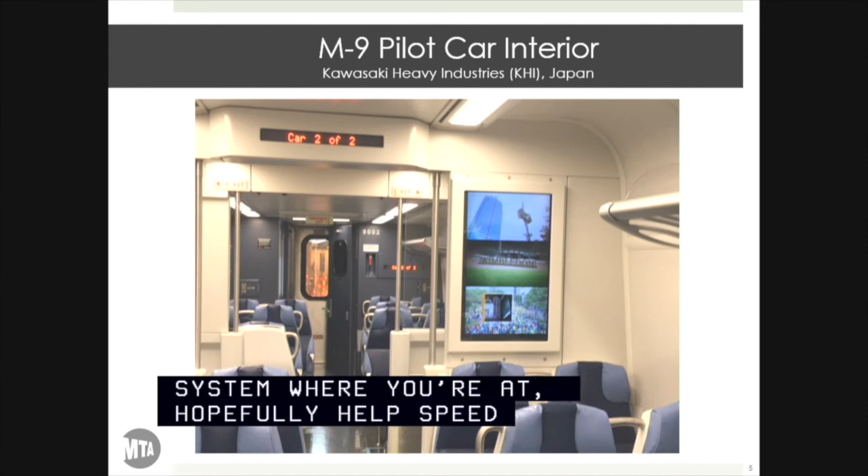So that way, as our conductors work, navigating the system where you're at, hopefully it'll help speed up. Kind of an interesting tidbit, we probably take about 30 to 40 delays a month just by people not knowing where they're at because it's just so complex.

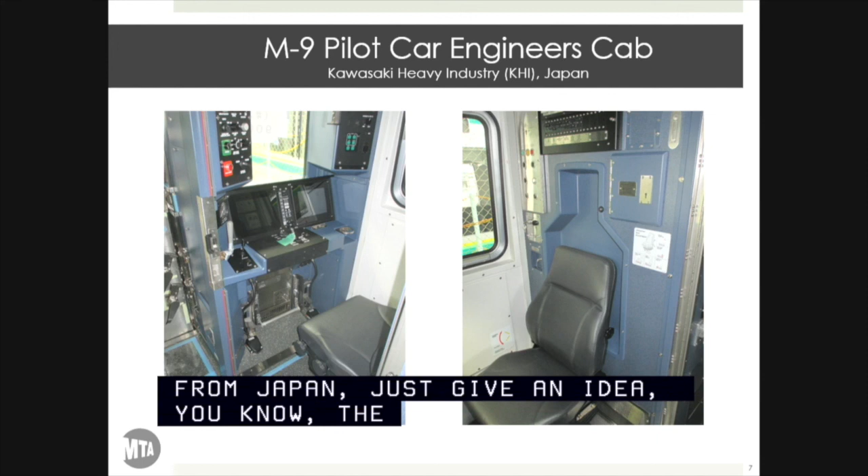Another thing I wanted to point out was what's shipping over from Japan, just to give an idea. The engineering compartment stuff's ready to go. These things will be equipped with all the hardware from CCTV, PTC, rolling off, day one, which is really nice to have in place.

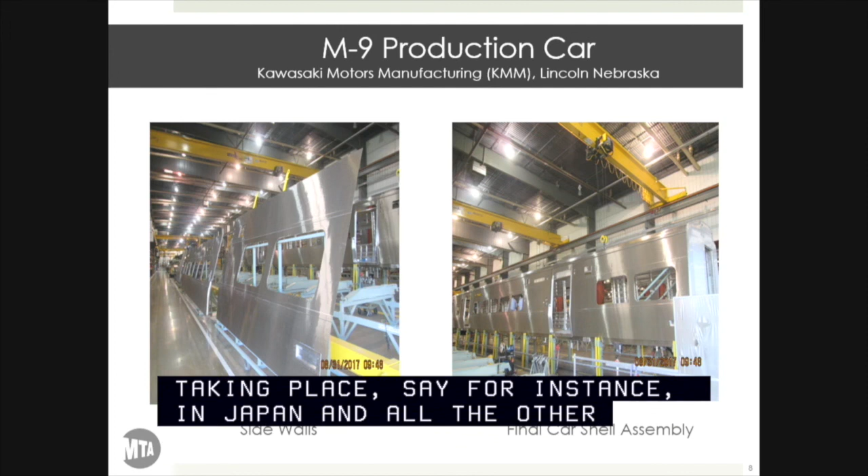Also, on these projects, one of the things I've been stressing with staff is that it's a global project. Works multiple continents, multiple states, multiple countries. So this is, for instance, what's taking place in Lincoln, Nebraska. This is real steel being dropped, actually happening during the summer. While all the focus was really taking place in Japan and other locations, one of the things that was a big driver is making sure that we do not drop the ball in all of these other steps. That's what gets you in trouble if we're not looking at the complete playing field.

The other side of it is just some more superstructure and stuff that's being assembled. The car shell will be welded, put together, and then its next journey for us will be to Yonkers. That's where all of the final assembly of underfloor wiring, boxes, air conditioning racks, that's where the final assembly for the full production cars will take place.

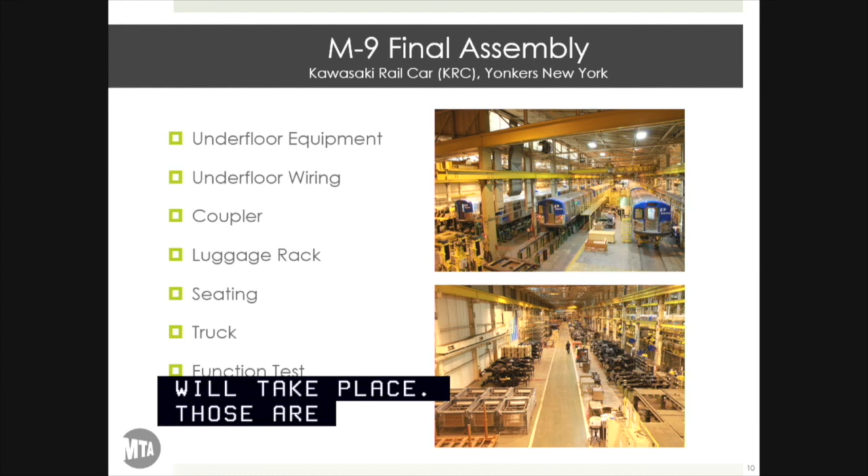Those are not ours, as you can see, but we do make sure that we're checking all the steps to make sure that we've got room for Long Island Railroad. The capacity and stuff is there. They're able to receive our materials and work accordingly.

That concludes my comments. Thank you, Dave.

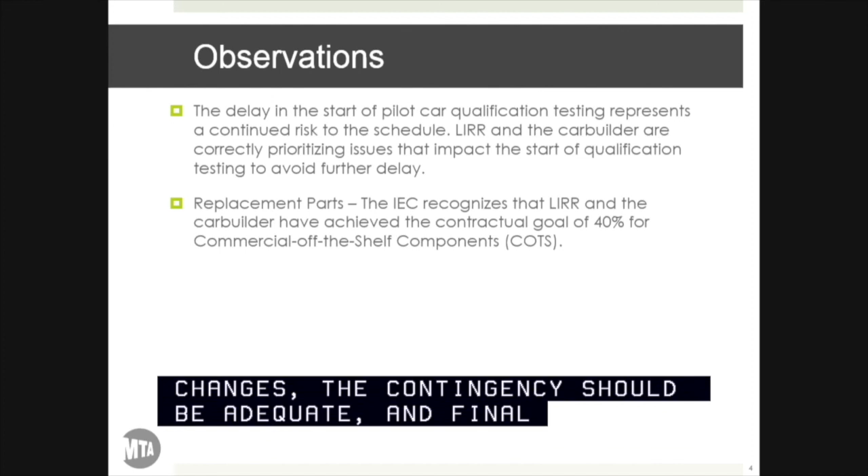Final slide on observations. Once again, just on the pilot car qualification test program, if that goes well, then that's where the risk is right now. If that goes well, the program should finish up where they're projecting. And finally, as Dave said, the COTS, Long Island Railroad and the car builder have achieved the 40% COTS, commercial off the shelf. Thank you.

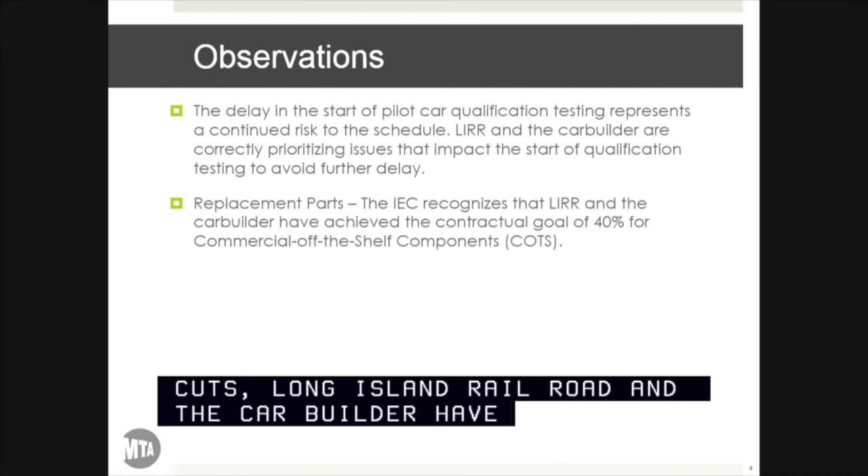Thank you, Mr. Chairman. So there are two risk assessment briefs in the book. The first one is Long Island Railroad Morris Park Locomotive Shop and Employee Facility. The details here were discussed by Paul Dietland during his presentation. There's also an MTA new fare payment system risk assessment brief on page 120. The project team, Al Poutre, actually discussed that risk assessment and the details at the Finance Committee. So we'll just open it up to questions.